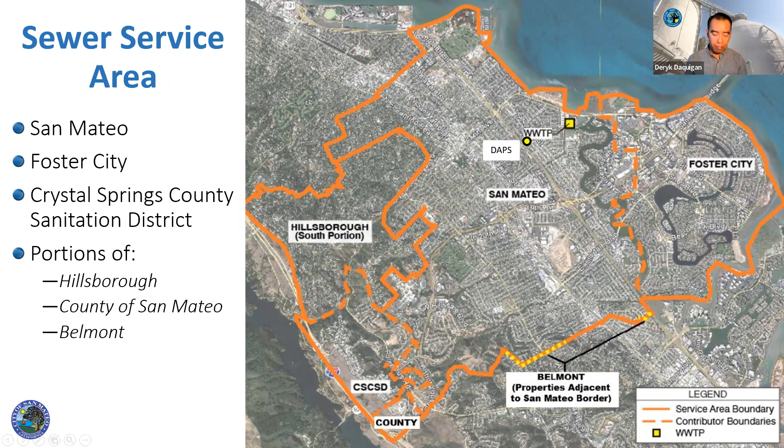The purpose of any wastewater collection and treatment system is to collect and convey the wastewater to the treatment plant, treat the wastewater, and discharge the treated wastewater into the San Francisco Bay. This is typically done through a network of sewer components, depicted through the image on the bottom.

The gravity mains collect the sewage and allow gravity to make it flow down slope. Once a gravity main becomes too deep, pump stations and force mains are utilized. The pipes coming out of pump stations are called force mains because there is pressure from the pumps forcing the sewage back up to a higher elevation. In some systems, a pump station force main is utilized to convey the wastewater to the treatment plant.

Our San Mateo sanitary collection system consists of 240 miles of sewer, 5,800 manholes, 26 pump stations, the largest being the pump station at Dale Avenue, and it ultimately collects all the wastewater that gets treated at the wastewater treatment plant.

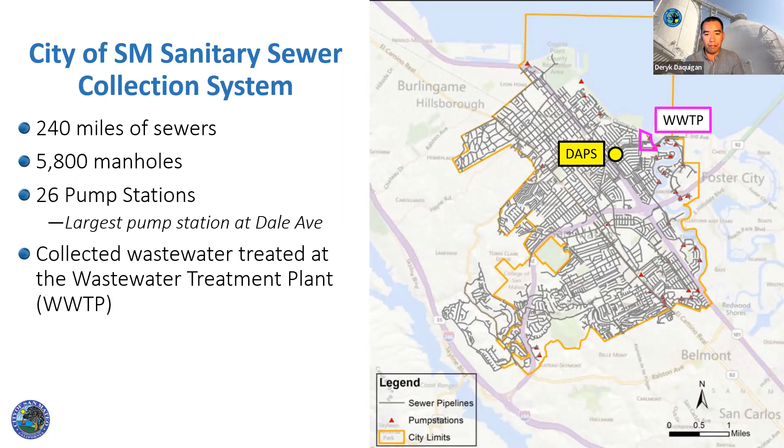The challenge with any system is that once it is built and installed, components start to age and outgrow its useful life or the needs of the growing system. Our San Mateo system works pretty well, but there are definitely some aging components of our infrastructure that need to be replaced and improved.

Portions of our system do not have the capacity to properly maintain operations during peak wet weather. When there is significant rain, the rain infiltrates into our system through defects and mixes with the raw sewage. This diluted sewage sometimes exceeds the capacity of our system, and a sanitary sewer overflow, or SSO, occurs in our system. The video to the left shows an SSO occurring at the intersection of Delaware and Saratoga near the San Mateo County Event Center.

The image in the middle is a map of the city with an overlay of blue dots. Each of the blue dots represents a historical or modeled sanitary sewer overflow location in the system. So when an SSO occurs, the diluted wastewater comes out of the pipes, overflows out of the manhole onto the streets, then into our gutters, into our drain inlets, into our channels and creeks, and into our marina lagoon, and making its way into the San Francisco Bay. Contamination occurs along every path of that travel.

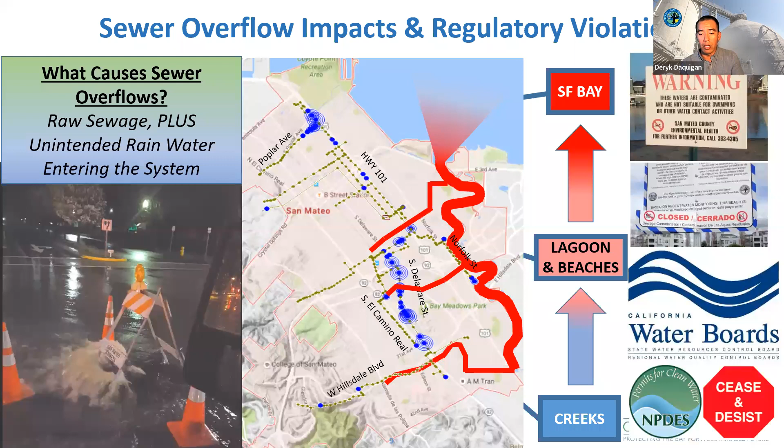The city is aware of the issue. In some instances, we've had to close our beaches because of the contamination in the water. In 2009, the California Water Board issued the City of San Mateo a cease and desist order mandating the city to eliminate SSOs from occurring in the system.

As a result, the city evaluated the deficiencies in our system, and in 2015, we established a clean water program. The goals of the program are to replace aging infrastructure and facilities, build wet weather sewer system capacity to assure against sanitary sewer overflows from occurring, to meet current and future regulatory requirements, and to align with the city's sustainability goals. Ultimately, the goal is to protect the Bay and our community for a sustainable future.

Now let's give a little bit more information on the Dale Ave Pump Station. Many of you are here tonight because your property is within the vicinity of the Dale Ave Pump Station, and you probably received a notification about the project. It is located at 1025 Patricia Avenue, as shown here in the image. It's east of Highway 101 and north of Highway 92, approximately half a mile west of the treatment plant, and is surrounded by Patricia Avenue, Young Street, Hemlock Avenue, and Norfolk Street.

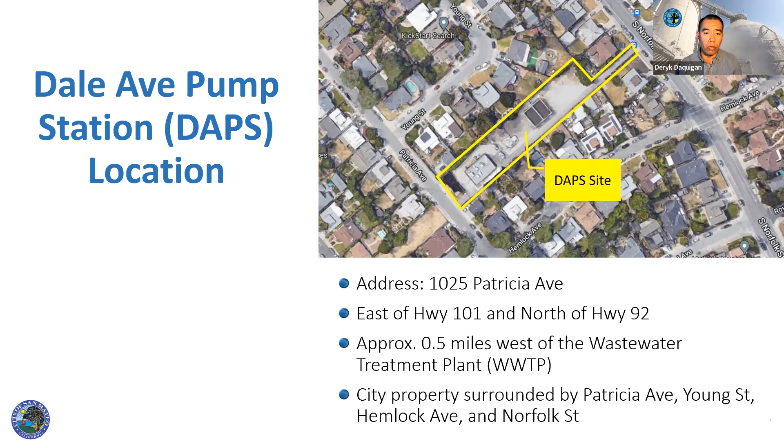As I mentioned before, it is the city's largest sanitary sewer pump station. It also has to operate 24 hours, 7 days a week. It consists of 5 large pumps, 2 force mains that pump the wastewater from the Dale Avenue Pump Station site to the wastewater treatment plant through the force mains on Dale Avenue. On average, it pumps 6 million gallons per day, and during peak wet weather, it has the capacity of pumping 61 million gallons per day.

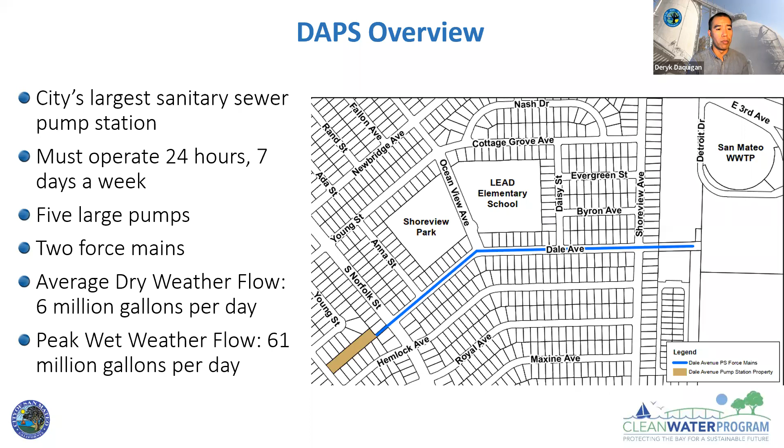We've actually had a Dale Avenue Pump Station project under construction since 2020. And since then, many improvements have already been done. We've replaced pumps, piping, valves, and other associated elements. We've lined the existing force mains on Dale Avenue and installed access chambers. We've completed process improvements, electrical instrumentation and ventilation system improvements, and improved safety and accessibility for our staff to operate and maintain the facility as well.

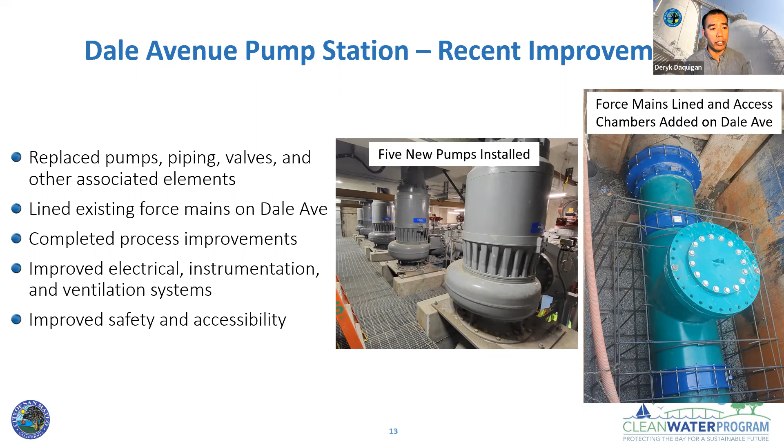Now let's talk about the future standby generator installation. So why do we need an emergency generator? Ultimately, it provides a backup power source for the Dale Avenue Pump Station if power service is interrupted to maintain the 24/7 operations. A new generator will meet the newer stringent air quality requirements. And if DAPS is unable to operate for a long period of time, sanitary sewer overflows will occur throughout the entire system. By adding the new generator, we will help to prevent SSOs during power failures and also protect our community and environment.

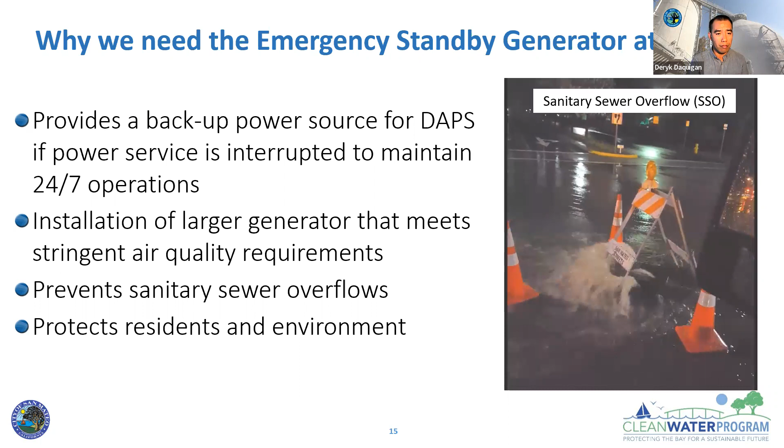The generator is proposed to be placed on the east side of the parcel, as shown here and circled in yellow. The city evaluated other locations on the parcel, but there were constraints such as underground utilities, accessibility, and zoning setback requirements. So the eastern portion of the parcel is the most feasible location for this new generator.

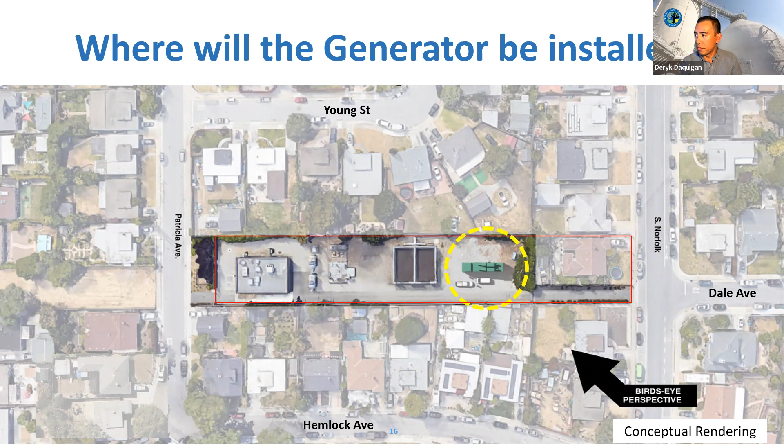Here's an aerial rendering of what the generator may look like on the parcel.

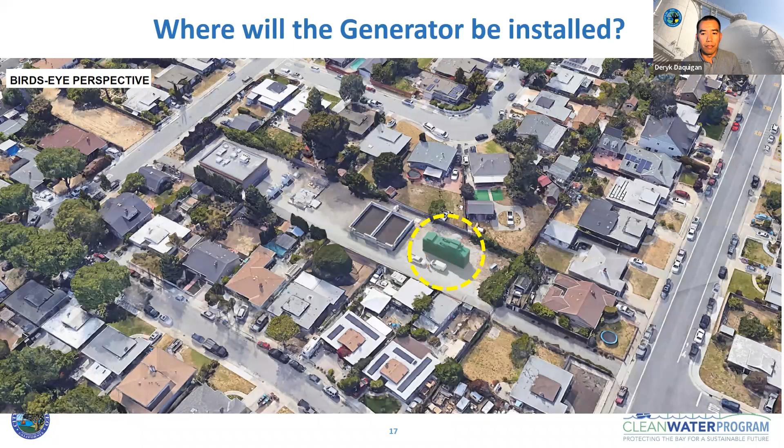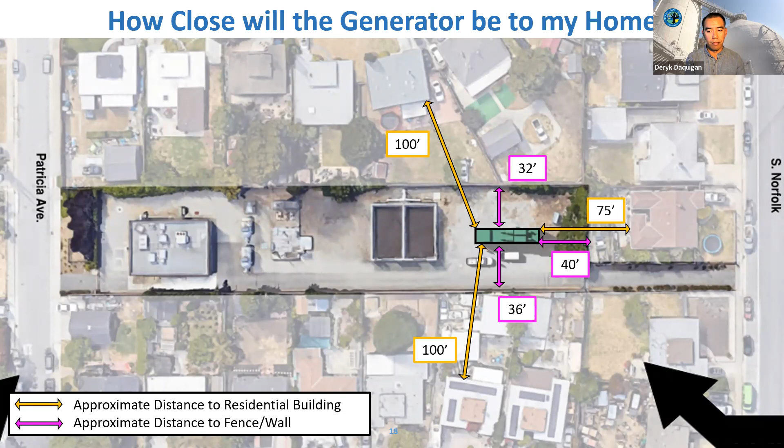This and the next 2 slides will show schematic cross sections to display the approximate distances between homes, fences, or walls and the generator, along with how much of the generator may be visible above the fence or the wall from the building. In the upper image, the red lines and arrows represent where the cross section represents and the direction that the cross section is facing.

This cross section shows the home on Young Street to the north of the generator, and based on the approximate height of the existing fence and the distances between the home and generator, approximately 11 feet of the generator will be visible above the fence.

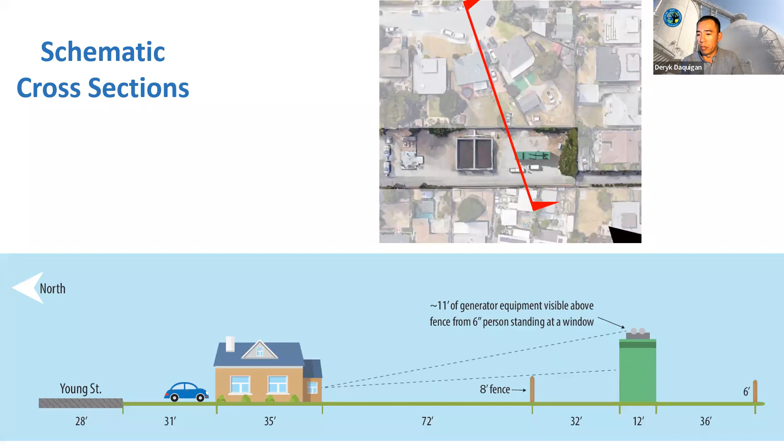This cross-section is of the home on Hemlock. There is a 6-foot wall separating the properties. Approximately 11 feet of the generator will be visible above this 6-foot wall.

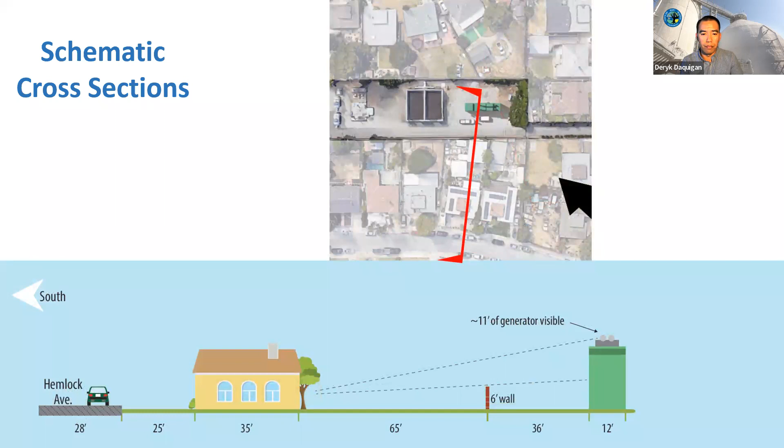And the last cross-section is of the home on Norfolk. There's an 8-foot fence separating the properties. With this situation, approximately 9.5 feet of the generator will be visible above the 8-foot fence.

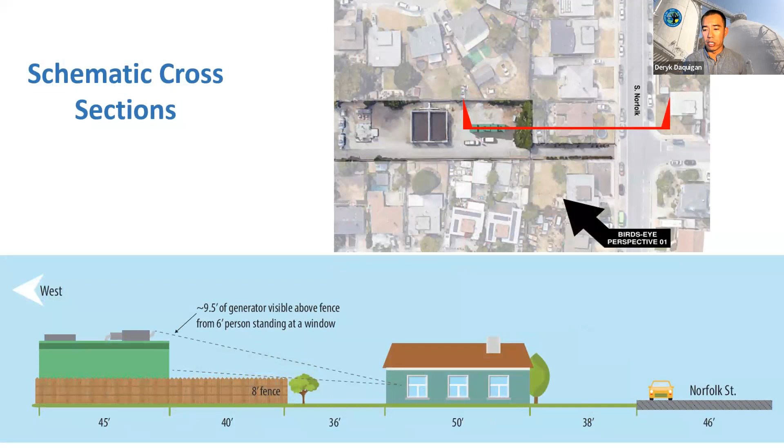Now, what to expect during construction? The next 2 slides will provide you a step-by-step phasing.

First phase will be site preparation. It's going to take approximately 1 week and average 2 heavy vehicles per day. For site prep, we'll have equipment such as the one depicted on the upper right image. We'll have active dust control and complete site clearing to make sure that the eastern portion of the parcel has enough room to install this.

Phase 2 is excavation. We'll remove a portion of the soil on the site for a pad foundation, and this requires heavy machinery for digging. Same thing, about 1 week and 2 heavy vehicles per day, and active dust control throughout construction.

Phase 3 is drilled pile installation. It's going to be about a week, 3 piles per day, and 3 heavy vehicles per day. We'll still have dust control, and we'll need to drill approximately 8 to 10 piles for the foundation of the generator. As part of the excavation and drilling, we'll have off-hauling vehicles to remove the soil from the site.

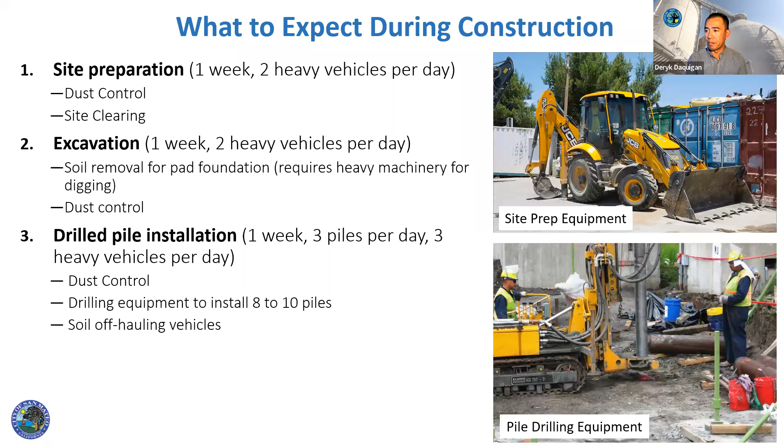Next 3 phases. Phase 4 is to form and pour a concrete foundation. This will take about 2 weeks to lay the rebar, put the formwork, and then pour. We'll have trucks and pumping equipment to pump the concrete into place.

Phase 5 is actual equipment installation. This will take approximately 2 weeks, with 2 heavy vehicles to deliver and place the generator. The image to the bottom right shows 1 crane and 1 heavy equipment delivery truck bringing in a generator onto the site. We'll have traffic control during the delivery, and install generator, piping, and wiring as part of this phase. The last phase is testing and startup, which will take 2 weeks to test and run the generator to make sure it operates correctly.

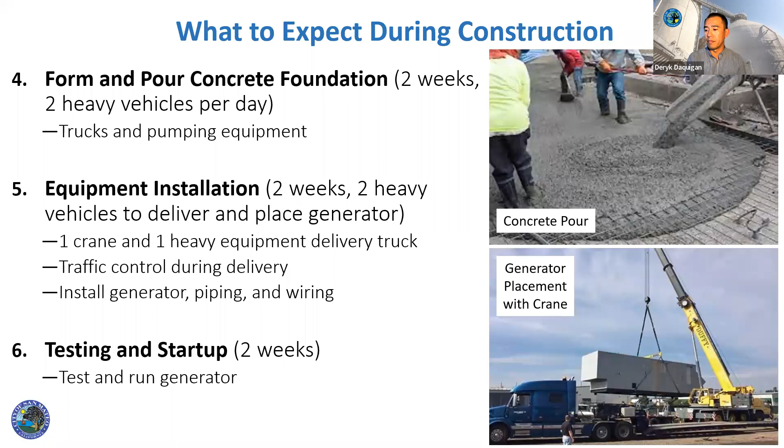So this is just a summary of the anticipated construction schedule, outlining the previous 2 slides. In total, we're anticipating to start construction in spring 2023. It will take approximately 2 to 3 months based on the schedule that we've outlined. And of course, with any type of schedule and construction, there is subject to adjustment to address any issues that may come up.

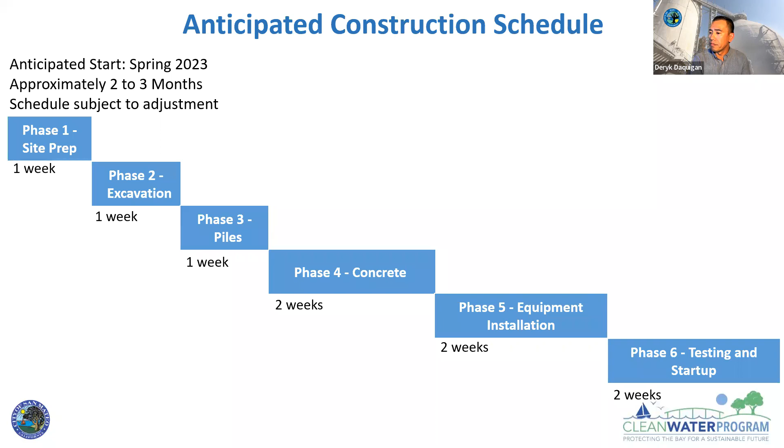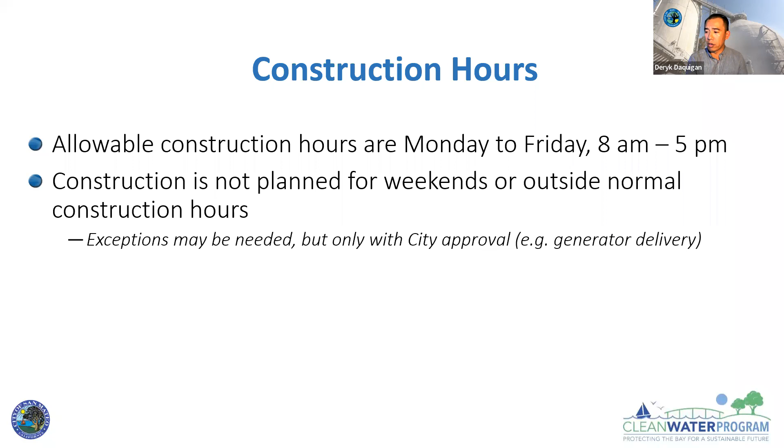For construction hours, it's going to be similar to our active construction project. Allowable construction hours are Monday to Friday, 8 to 5 p.m. Construction is not planned for weekends or outside normal construction hours. However, if exceptions may be needed, we may have city approval, such as for the generator delivery.

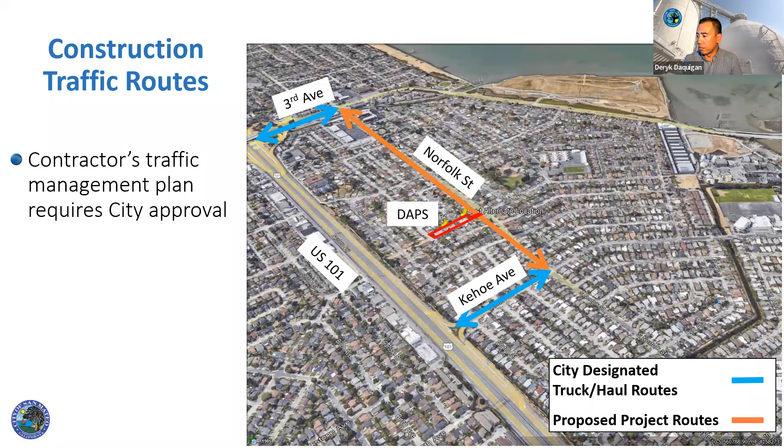Now let's talk about what happens after construction in terms of operations and maintenance. So the generator is expected to be used when power service is interrupted. On average, we've historically had to run our old generator up to 8 times per year for 1 to 3 hours per use, and that's when power service from PG&E is interrupted.

Secondarily, we are required to run the generator for testing and maintenance, no more than 50 hours per year, to maintain our air quality management district compliance. So on average, it's about half an hour per month, and also 1 yearly 2-hour test to meet the regulatory requirements.

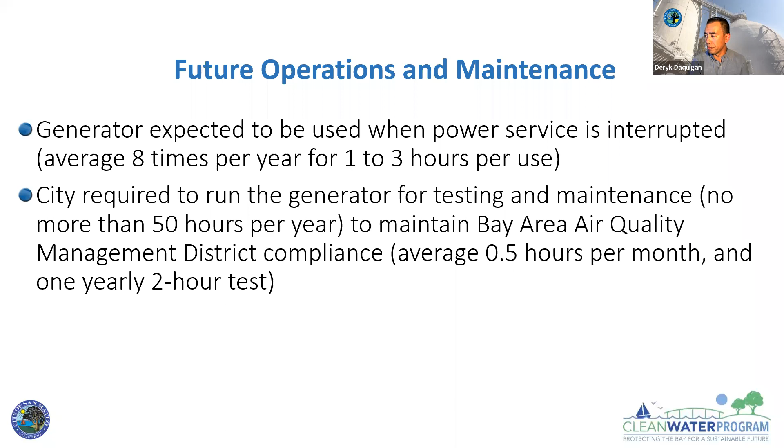But as I stated, the emergency generator is exempt. However, regardless, we will be placing the generator in a sound attenuated enclosure. This reduces the sound pressure levels to 72 decibels at the property line when in use. The existing property fence and walls will provide additional sound attenuation, which we've estimated to reduce the sound levels by 5 to 10 decibels.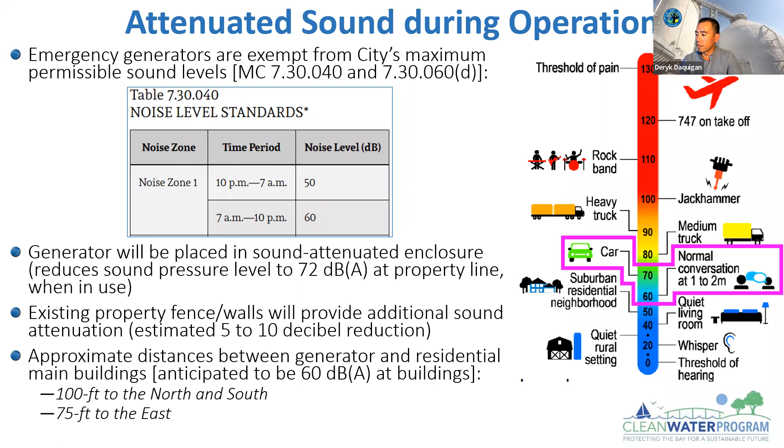Based on the approximate distances between the generator and the residential homes, 100 feet to the north and south and 75 to the east, we're anticipating the decibel levels to drop to about 60 decibels at the buildings. The image shows a meter of what different decibel levels sound like. At 60 decibels, it's like a normal conversation at 1 to 2 meters, and at 70 decibels, it's like a car driving by. Lastly, this new generator with exhaust equipment will reduce emissions during operation and will meet the air quality requirements.

The exhaust equipment will treat the exhaust and release nitrogen and water to the environment, keeping our air quality in the neighborhood clean.